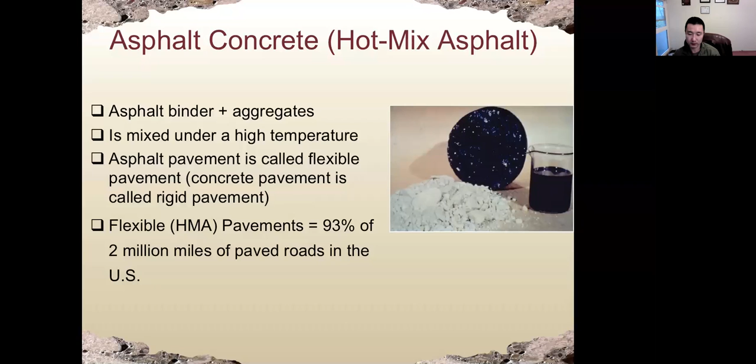The desired property for hot mix asphalt concrete pavement is stability, which means it needs to resist permanent deformation under load, and also fatigue resistance. The road will undergo repeated loading, so fatigue resistance is very, very important. And also resistance to thermal cracking, because when we have temperature change, it will contract or expand based on temperature.

It's easy to get cracking at low temperature, because at low temperature it becomes more rigid. And also resistance to hardening or aging, both during the production period and during the service period.

Remember last lecture we talked about the rolling thin film oven test, or RTFO test, which simulates the aging process during production day. And also we talked about the pressure aging vessel test, which simulates the aging process during the service life. So aging process is very important for asphalt binder.

Also resistance to moisture-induced damage. We call that stripping - stripping asphalt from the aggregate. This is kind of similar to debonding of the Portland cement paste from the aggregate.

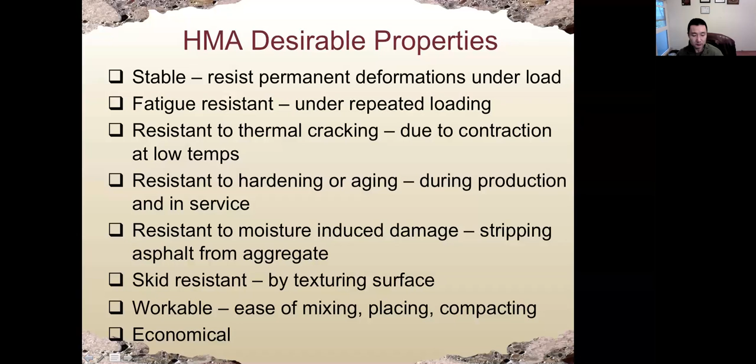So based on the above performance requirements, we have this HMA design criteria, including stability, long-term performance which is fatigue, thermal cracking - we also call that temperature sensitivity - moisture-induced damage, which is the debonding between the asphalt binder and the aggregate, also called stripping, skid resistance, workability, and also load capacity. These are the design criteria for hot mix asphalt concrete.

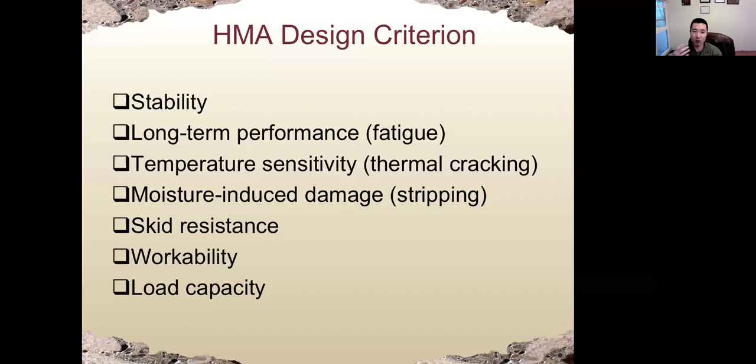But in this class, we will not go into the details of how to design asphalt pavement. The design is called Superpave mix design, which is not covered in this class. You'll take CE461, or I think maybe 361 - it will talk about how to design asphalt pavement. This is a pavement engineering class. In this class, we will focus on material properties.

So let's look at in general the preparation process when we prepare the hot mix asphalt pavement. First of all, we need to prepare the aggregate. We need to crush, screen, and also store the aggregate. Aggregate needs to be proportioned depending on the mix design.

Also a special treatment for the aggregate is drying and heating. If we have moisture on the aggregate, it will cause debonding or stripping of the binder from the aggregate.

This is different from Portland cement concrete. For Portland cement concrete, we don't really care about making the aggregate dry. It can have some moisture, like wet condition, oven dry, or air dry condition. We only need to do the moisture adjustment. But for asphalt concrete, we need to dry the aggregate. So this is one of the major differences on the aggregate side.

Also the aggregate needs to be heated up. The temperature needs to be high because, again, asphalt cement needs to be heated to reduce the viscosity so it can be mixed with the aggregate.

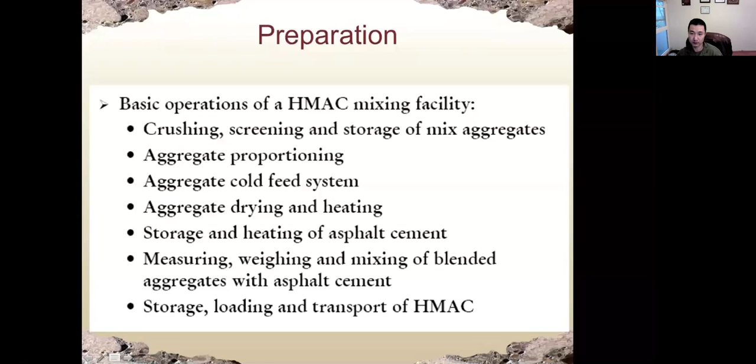So aggregate must be heated to the required mixing temperature. There are two purposes: one is to drive off the moisture, and the second is to maintain the same temperature as asphalt cement, so we can mix asphalt binder with the aggregate. Here it shows us what heating methods could be used for the asphalt aggregate.

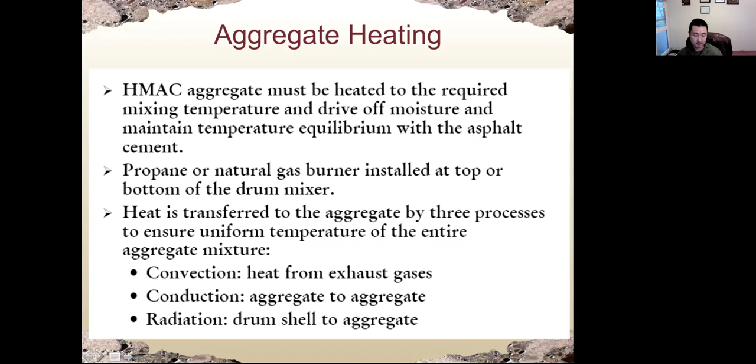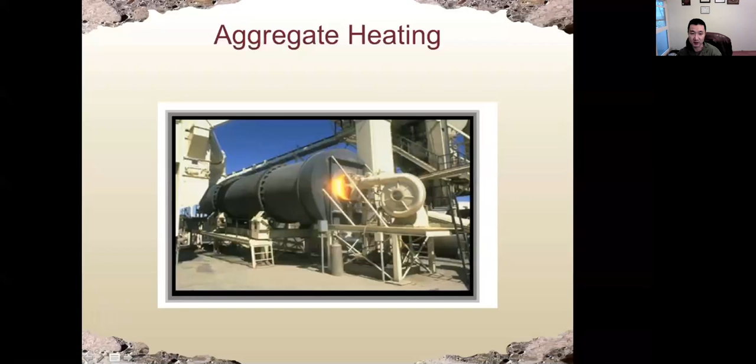Here is a picture of aggregate heating. This is the aggregate conveyor, and we have a dust collector, and the aggregate is heated up in this big oven.

Here we talk about more details on aggregate production. The clay on the surface of aggregate can cause problems such as stripping or debonding. Another potential problem is clay may make the asphalt cement swell and emulsify the binder, meaning it makes the binder soft, which is not good. Dirty aggregate can also reduce adhesion of the binder, so we need to clean the aggregate before mixing it with the asphalt binder.

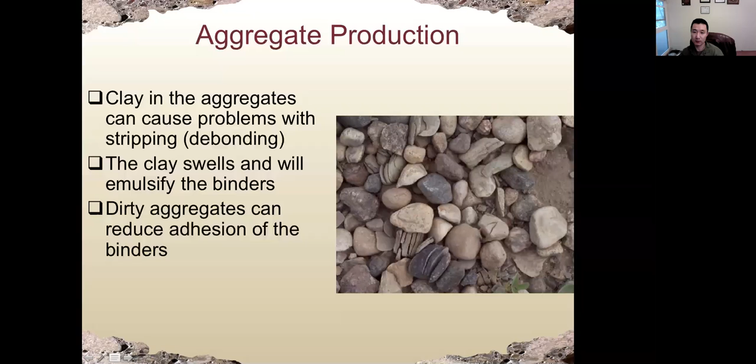Next, let's talk about the gradation of asphalt concrete aggregate. Gradation is very important for asphalt concrete. It is actually more important compared with the gradation for Portland cement concrete.

The major reason is because for Portland cement concrete, the cement paste is very strong and can take a lot of load. But for asphalt binder, it is semi-rigid and kind of soft, so it cannot take the load by itself. The load transfer depends on the gradation, or the interlock between the sand and the coarse aggregate. That's the reason why gradation for aggregate in asphalt concrete is very, very important.

The second one is called well graded. We have small, medium, and large size aggregate. We have good interlocking between the aggregate, and the concrete has low permeability.

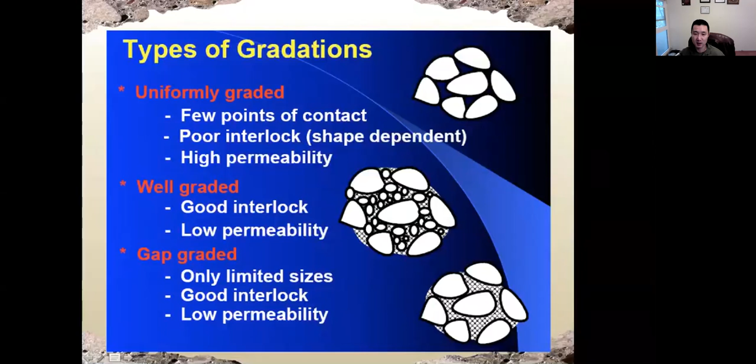This belongs to the second category, the well-graded mixes. It has both coarse, intermediate, and small aggregate.

The next one is called coarse graded mixes. It also belongs to the well-graded category, the second category. In this gradation, both coarse aggregate and fine aggregate will work together; they will take the load together. For coarse aggregate, because we have a higher percentage of coarse, we have some particle-to-particle interaction, contact between coarse aggregate.

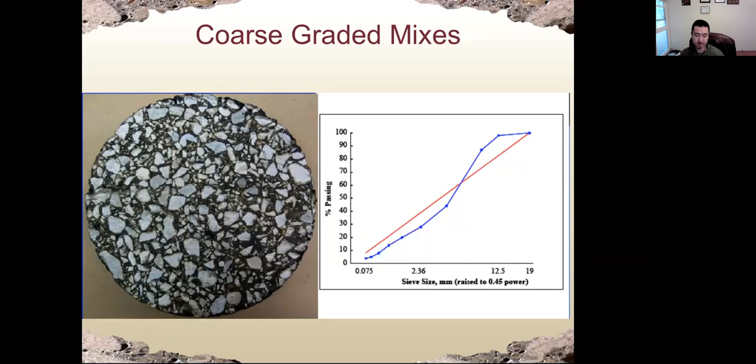And in this one, we can see obviously we have much more percentage of coarse aggregate, and we call that gap graded mixes. For gap graded mixes, the coarse aggregate is in control; they take the majority of the load transferring. So we have a lot of particle-to-particle contact between coarse aggregate.

So which type of gradation we choose for asphalt pavement depends on information such as the thickness of the pavement, and also some other information. As you can see, the gradation for aggregate in asphalt pavement is very strict. Again, the major reason is because aggregate will take most of the load transferring job, since asphalt binder is very soft.

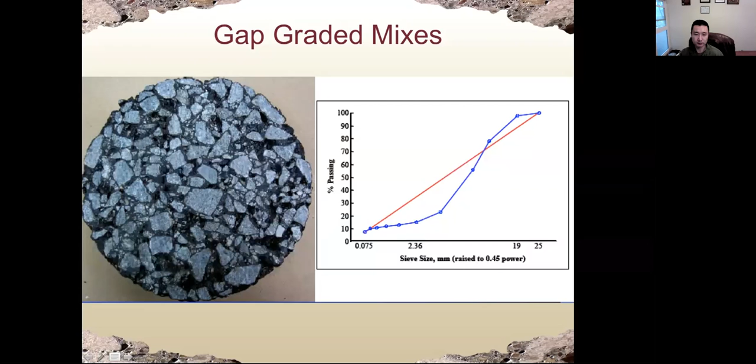Here is about the preparation of asphalt cement, the binder. We need to heat it up so we can make it soft to mix with sand and coarse aggregate. And also we need to ensure we have sufficient uninterrupted mixing.

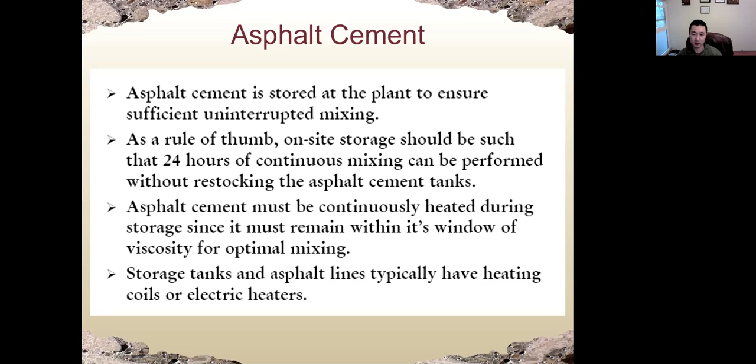We also have asphalt binder, which has two parts. One part is called absorbed asphalt binder, which is the asphalt absorbed on the surface of the aggregate. We also have asphalt binder, VBE, where E is for effective, which is the asphalt binder that is not absorbed on the surface of aggregate.

We also have a small percentage of air voids in the system. The percentage of air voids is very important for asphalt concrete because the more air voids, the faster the aging process, since oxygen in the air will accelerate the aging process for asphalt concrete. Because of that, we have many different types of voids.

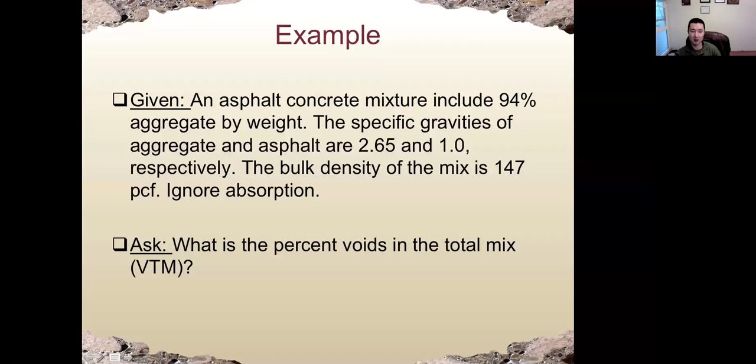The question asks what is the percent voids in the total mix, VTM. VTM is defined as VV, the volume of air voids, over Vm, which equals volume of voids plus VBE, the asphalt binder volume, plus Vs, the volume of aggregate plus the absorbed asphalt binder.

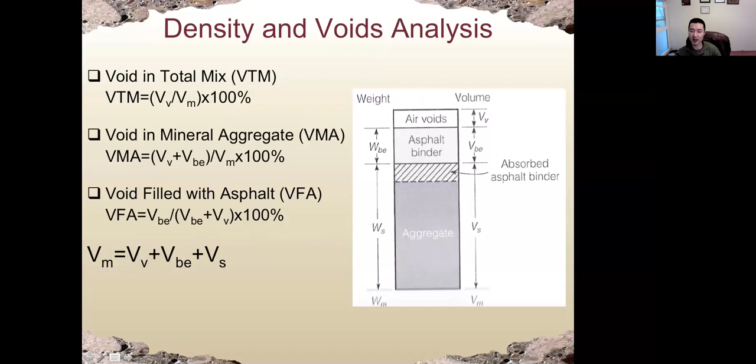For these kinds of questions, what we normally do is assume a certain unit volume or unit weight of material, and based on that calculate how much weight or mass for each type of material, then calculate the volume for each type, and from there do the rest of the calculation. So here we assume the total volume of the mix Vm is equal to 1 cubic foot.

Then we can determine the mass for each type of component. The total mass of the mix is equal to 1 cubic foot times the unit weight, 147, so we have 147 pounds of asphalt concrete. 94% of asphalt concrete is occupied by aggregate, so the weight of aggregate is that amount, and the remaining 6% is asphalt binder, giving us about 8.8 pounds of asphalt cement.

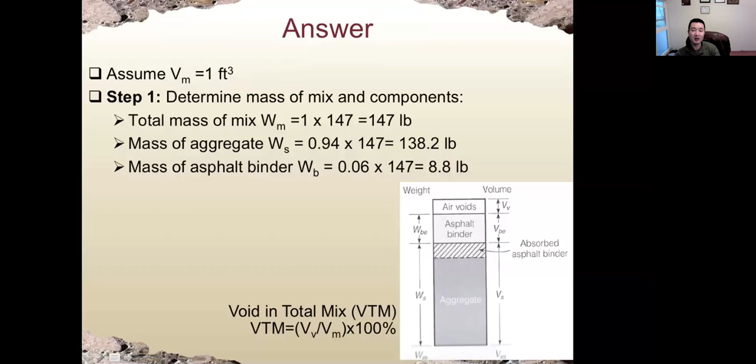Based on the weight, the mass, we can calculate the volume. For aggregate, the total weight divided by 2.65 times 62.4, where 2.65 is the specific gravity of the aggregate and 62.4 is the density of water, gives the density of aggregate. The mass divided by density gives the volume occupied by aggregate.

Similarly, we can calculate the volume occupied by binder, which is 0.141 cubic foot. Since the question tells us to ignore absorption, the effective binder VBE will be the same as the volume of binder, 0.141 cubic foot. The remaining volume will be occupied by voids.

This is similar to what we do in the mix design calculation for Portland cement concrete. The last step is we calculate how much volume is occupied by voids by subtraction: the total volume, 1 cubic foot, minus the volume occupied by aggregate, minus the volume occupied by binder. So the volume of voids is 0.023 cubic foot, from which we can calculate VTM, the voids in total mix.

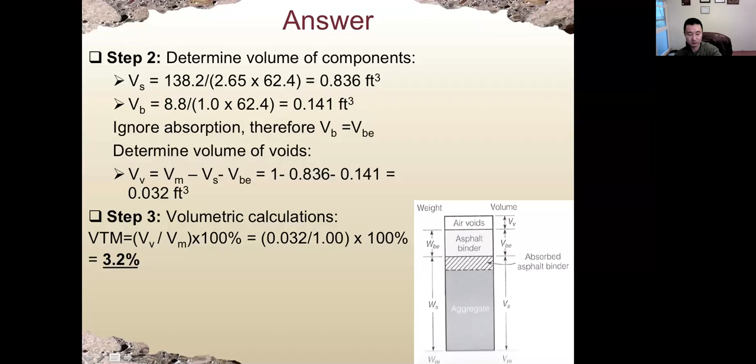All right, the final part of this lecture, let's look at pictures of different types of asphalt concrete distresses, different types of cracking.

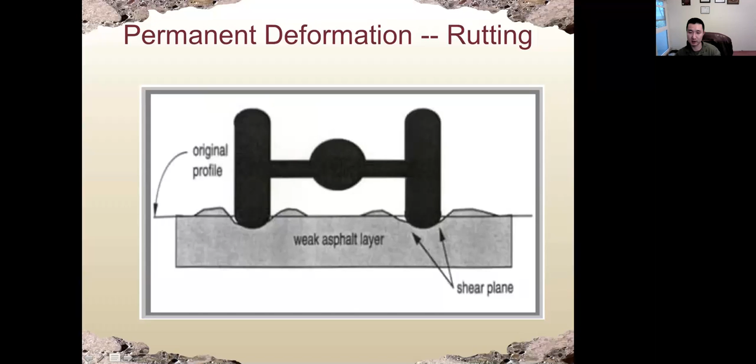Here also showing the picture of rutting. We can see it could cause potential problems, safety concerns, because after raining, this area will fill with water. So we could have hydroplaning, which is the water layer between the tire and the pavement. This is very dangerous.

All right, this is also a rutting problem. We also have another name for that, it's called pooching. The asphalt is just too soft.

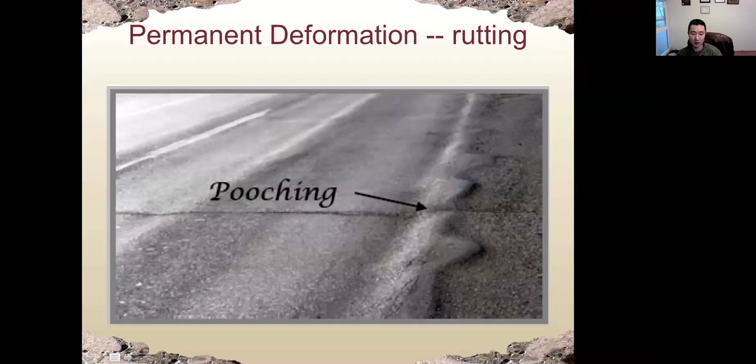This is called fatigue cracking. Fatigue cracking is caused by repeated traffic loading, and also because of the aging process of asphalt. The asphalt becomes too rigid, and that will cause asphalt to crack under fatigue load. The cracks will be interconnected to each other.

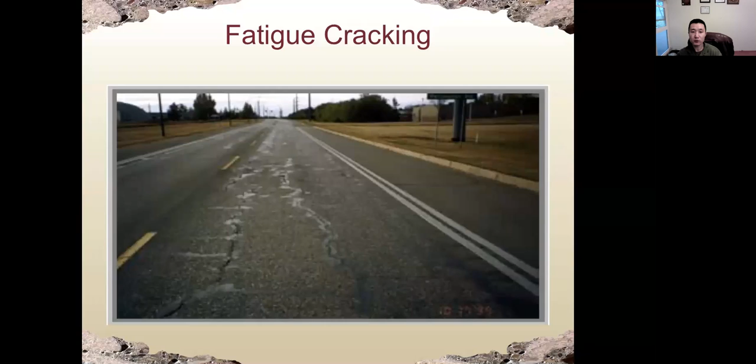Like we can see from here, this is a very common type of cracking for asphalt. I believe everybody has seen that type of cracking before. And also here, so fatigue cracking.

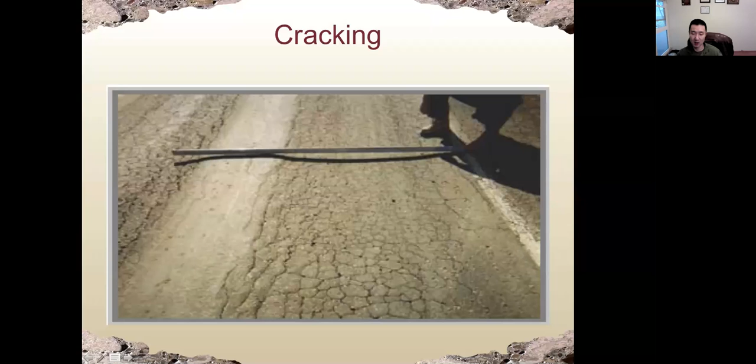This is the rutting caused by soft asphalt together with fatigue cracking. If the fatigue cracking becomes too severe, part of the asphalt can be spalled off, and we have potholes.

This picture has cracks which are perpendicular to the direction of the pavement. This is caused by temperature change, or thermal cracking. The reason for that is because we have temperature change during winter or summer, and the viscosity of the asphalt binder is too high, or we have aging problems for the asphalt, which cause the viscosity to increase.

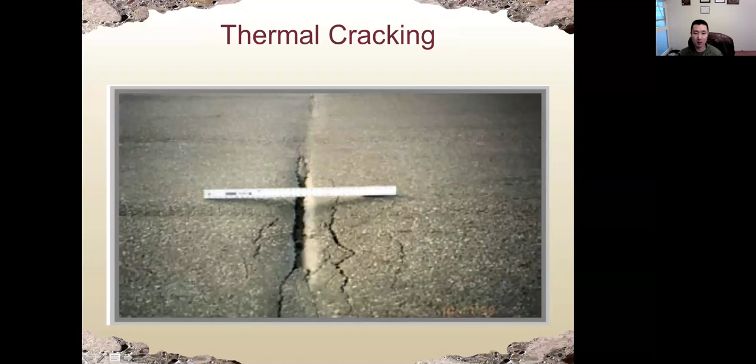So this is another picture for thermal cracking. Again, the pattern's direction, the crack direction, will be perpendicular to the direction of the pavement.

In this picture, the direction of crack is parallel to the direction of the pavement. We call that longitudinal cracking. This is another type of fatigue cracking due to repeated loading.

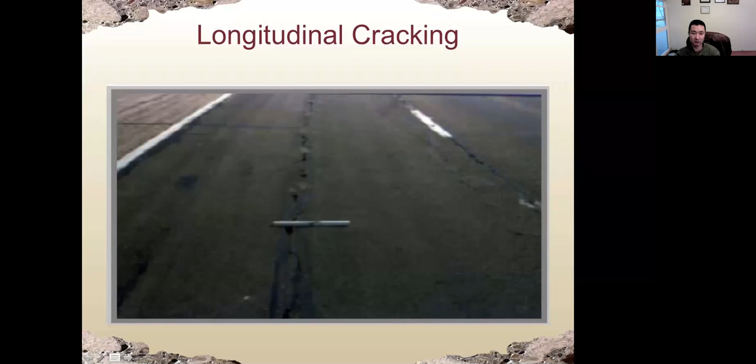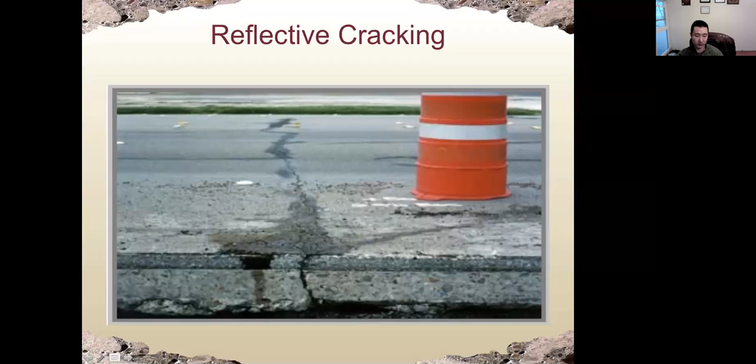Here is another picture of reflective cracking, and we can see above the joint of the Portland cement concrete, we have this cracking above that joint.

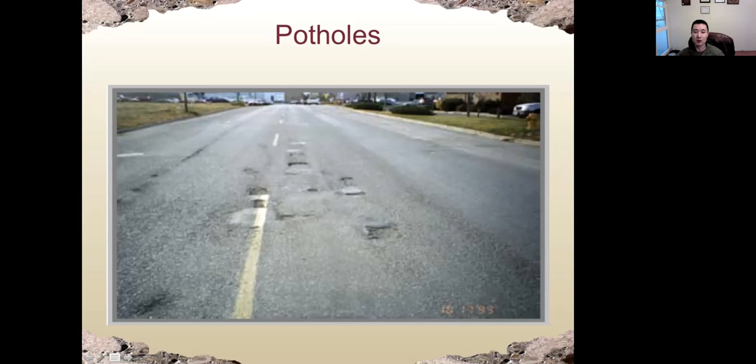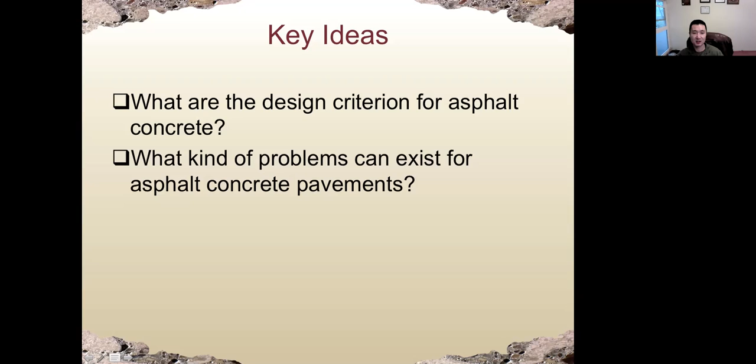Okay, so that's the end for the lecture, which is our last formal lecture for asphalt concrete.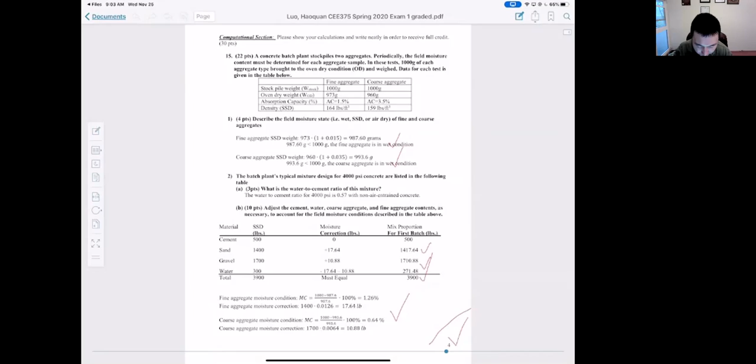So this is the last one of the calculation questions about mix design and how we do the moisture adjustment. Make sure you review that question.

In this question, we're given the stockpile weight of the sand and coarse aggregate, and also the oven dry weight of the aggregate, absorption capacity, and the density.

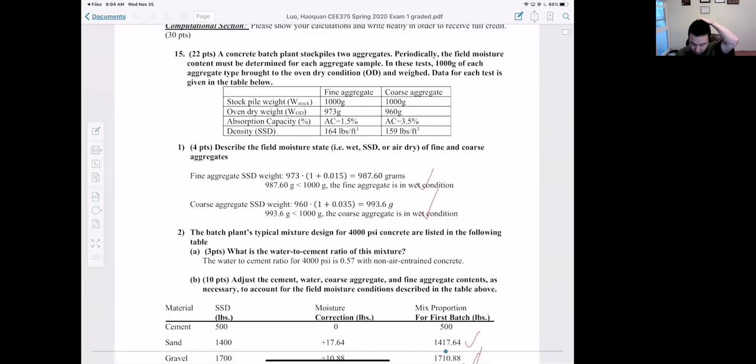The first part of the question asks to describe the field moisture condition. Some of us just describe oven dry, air dry, wet condition, and SSD condition. But here I'm asking what are the moisture conditions for these two aggregates. There are many different ways to do that, and here I show one of the ways.

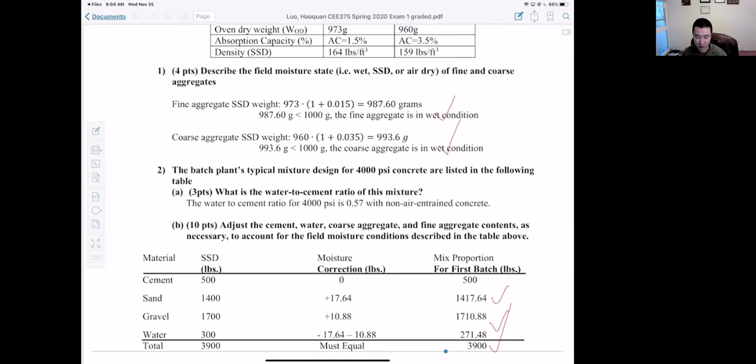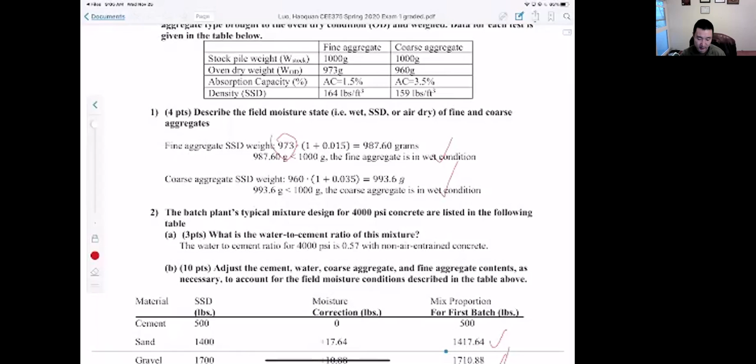We calculate the weight of saturated surface dry condition of the aggregate, which is equal to the oven dry weight times 1 plus AC, the absorption capacity. That gives the SSD weight of the aggregate. So for sand, the SSD weight is 987.6 grams.

We compare that with the stockpile weight. If it's smaller than the stockpile weight, that means the stockpile aggregate is in wet condition. If it's larger than the stockpile weight, then it will be in air dry condition.

For coarse aggregate, again we do this: oven dry weight times 1 plus AC. So the SSD weight is again smaller than the stockpile weight, so the coarse aggregate is also in wet condition.

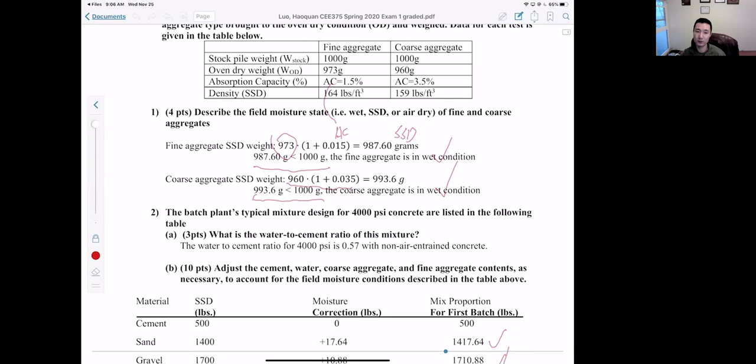The next part asks what is the water to cement ratio of the concrete. Remember, the water to cement ratio does not change depending on the moisture condition of coarse aggregate and sand. That's the exact reason we do the moisture correction.

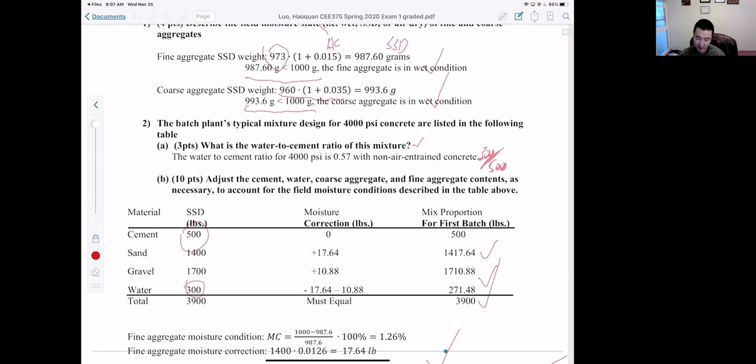How to calculate the water cement ratio is very simple. We just use the weight of water divided by weight of cement, giving 0.6. We just use 300 divided by 500. That is the water cement ratio we designed. Do not do the moisture correction here.

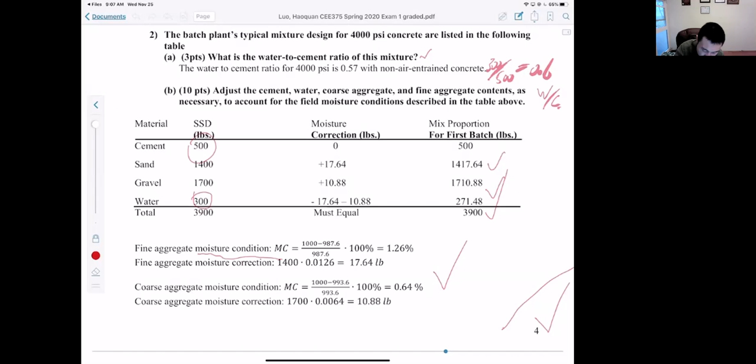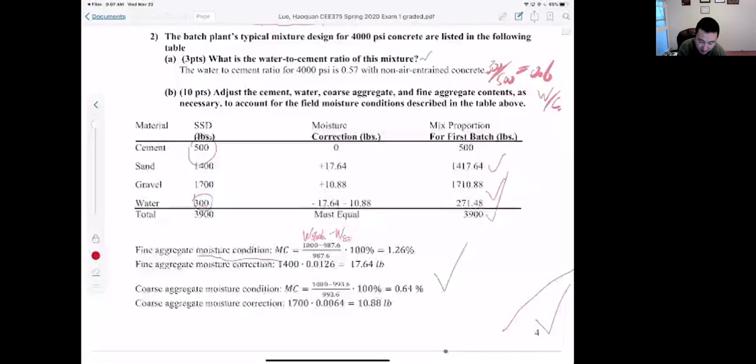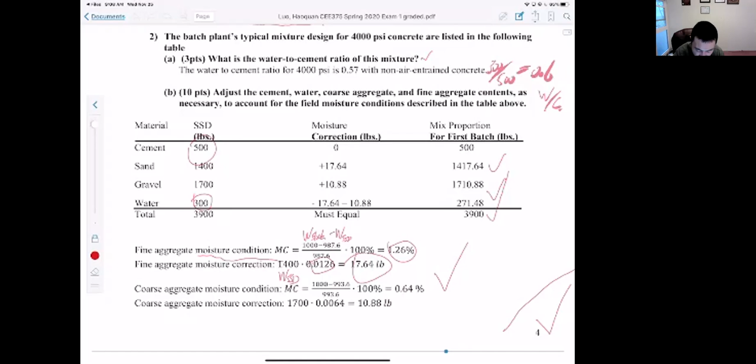The next part is to adjust the moisture condition. For moisture condition, we calculate MC, which is W stockpile minus W SSD, divided by W SSD. 1000 is W stockpile, 987.6 is W SSD. So this is the moisture content. We use moisture content times W SSD, so that is how much moisture is in the sand. That value plus W SSD is how much stockpile aggregate is needed.

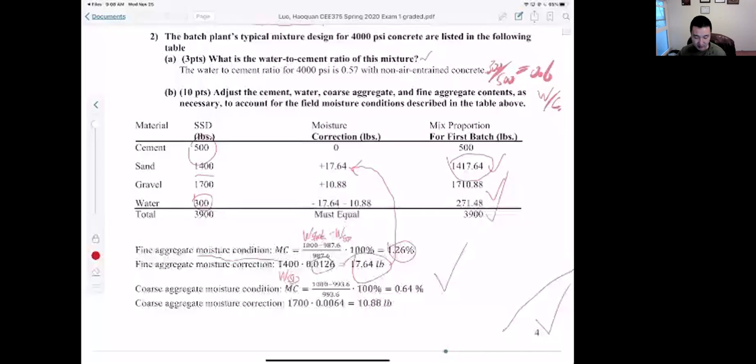Do not confuse moisture content with things like absorption capacity. Do not use absorption capacity to do the moisture adjustment.

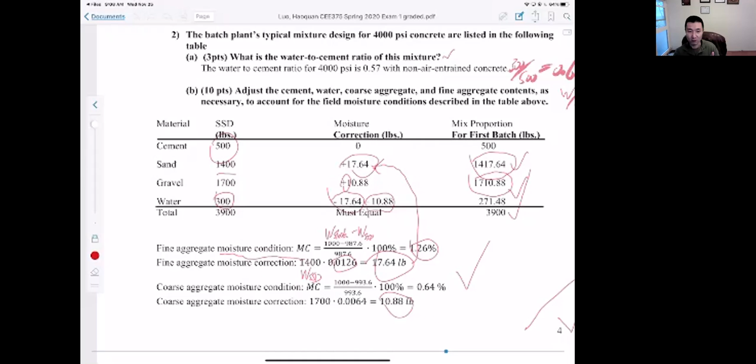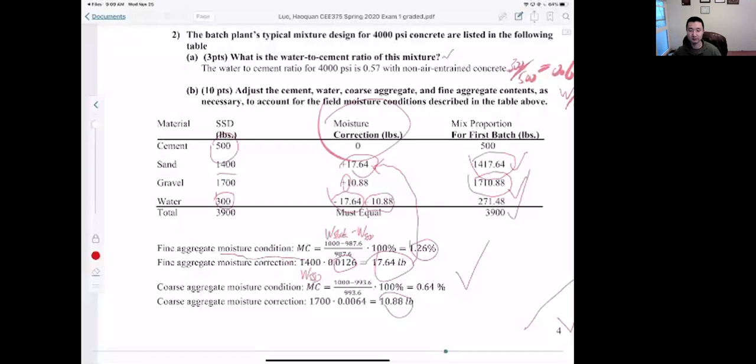Similarly, we can do the moisture correction for the coarse aggregate. This is plus 10.88 pounds, so we need 1710 pounds of gravel. That moisture will be subtracted from the mixing water, so we make sure the real amount of water in our concrete is exactly 300 pounds. We do not change the water to cement ratio in the system. That's exactly the reason why we do the moisture correction. If we change the water to cement ratio, the strength will change, and everything will change, because water cement ratio is the most important parameter in our concrete mix design.

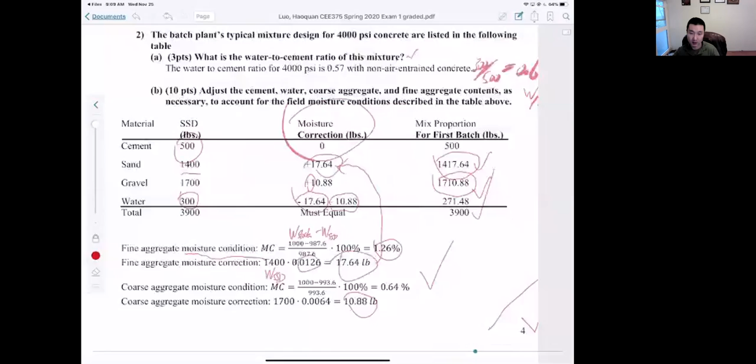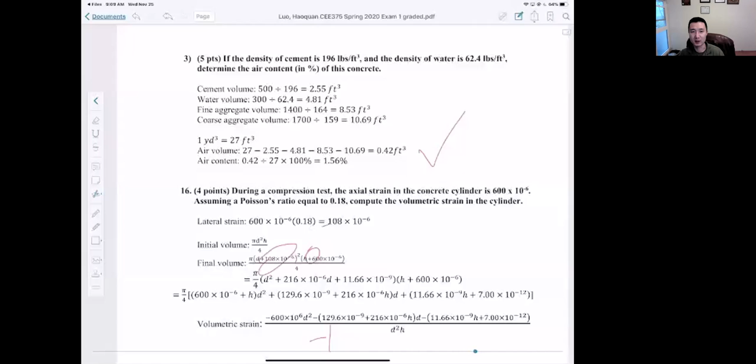Then the next part asks to calculate the air content of the concrete. For this type of calculation, what is the volume of a certain component in a system? We calculate the volume depending on the mass and the density.

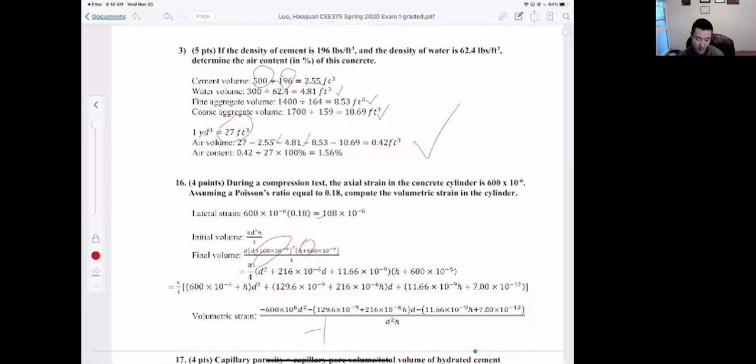For example, the mass of cement is 500 pounds, and the density is given as 196, so that's the volume of cement. You also can calculate the volume of water, volume of the sand, and coarse aggregate. The only remaining volume material will be the air. We use the total volume of 27 cubic feet minus the volume of all these components, so we have 0.42 cubic foot of air in the system. Divided by 27 total volume, we have 1.56% of air by volume.

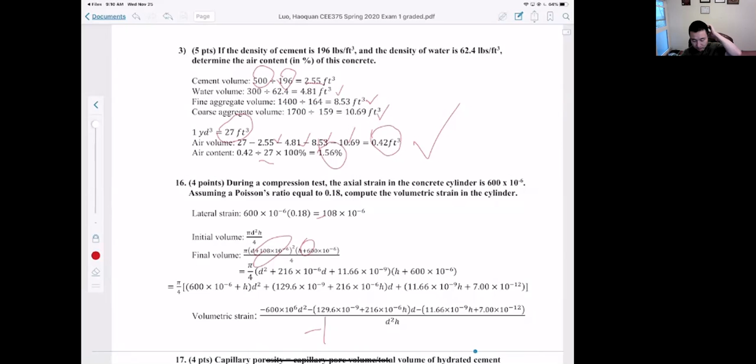Okay, next question. This asks us to calculate the volumetric strain in a cylinder.

Okay, in class I'll show you the equation for the volumetric strain. The volumetric strain epsilon V is equal to the strain in X, Y, and Z direction added together.

So this is a cylinder. For the cylinder, we have the strain in X, Y, and Z direction. Let's see, this is X, Y, and Z direction.

So the compression is in the Z direction, and it tells us the axial strain is 600 times 10 to the power of -6, and also tells us the Poisson's ratio is 0.18. So here the volumetric strain in the Z direction is this much, and this is under compression.

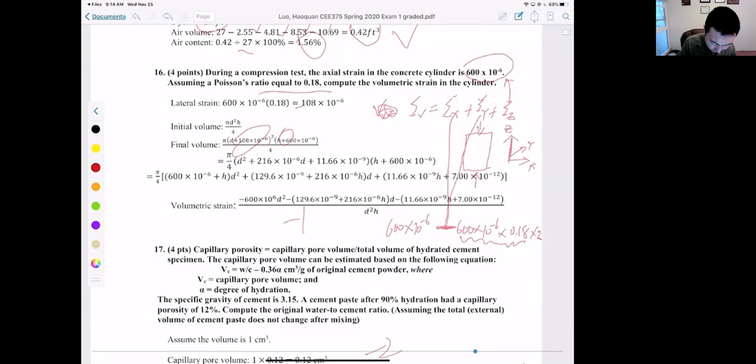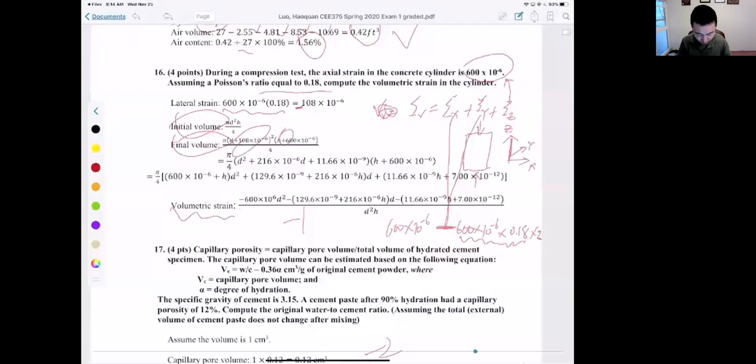So the lateral strain is this much, but don't forget this should be negative. So based on the initial volume and the final volume, we can calculate how much change in the volume, and then we can calculate the volumetric strain. Very good try for this example.

The final question is to calculate the porosity. The capillary porosity, given the definition, is equal to the pore volume of capillary pores divided by the total volume of hydrated cement specimen. So this question is kind of hard,

but I only give 4 points. The capillary pore volume equation is shown here. VC is the volume of capillary pores, which is a function of water-cement ratio and degree of hydration alpha.

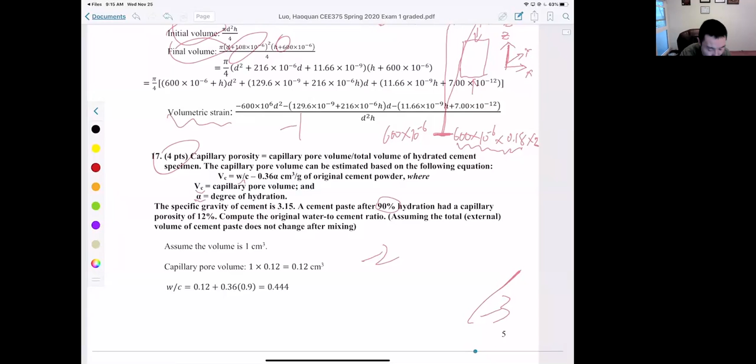The question also tells us the specific gravity of cement, degree of hydration 90%, and also the porosity of 0.12. So calculate what is the water-cement ratio here.

So again, for this type of question, we can assume a unit volume or a unit weight of certain component. Here I'll just show you, we assume we have 1 gram of cement. So if we have 1 gram of cement, so this cement, we have 1 gram.

And for water, how much do we have? We have W over C gram of water in a system. So we mix 1 gram of cement with W over C gram of water.

We can calculate the volume of the cement paste. So the total volume is equal to volume of water plus volume of cement. The volume of cement is equal to 1 gram divided by 3.15. This is the specific gravity of cement, which means for 1 cubic centimeter of cement, the weight is 3.15 grams. So this is the volume of cement.